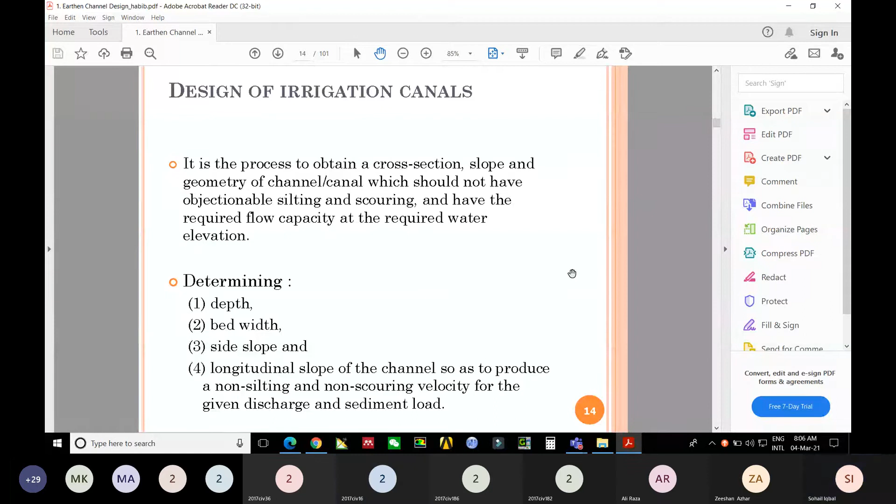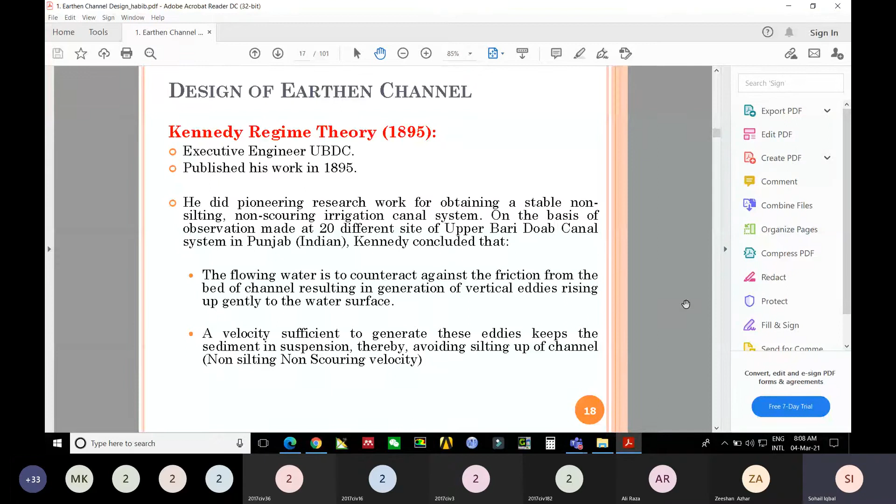So here is the Kennedy's regime theory, the most important part, and we have also studied about its conclusion in the last lecture, what he studied in 1895, and what were the conclusions of his theory. Now we will study about its equations, what equations he gave to calculate or study the velocity.

So the first formula he gave is 0.55d raised to power 0.64 in SI system. But with the passage of time, it was observed that the value 0.55 is not accurate for all types of areas. So he gave a general variable, that is m.

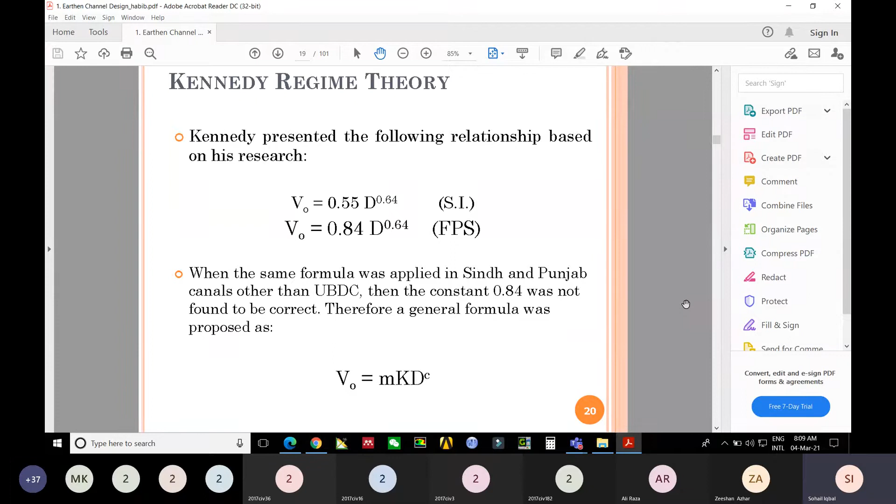M means it depends upon the area you are going to design, where you are going to design. The general formula he proposed is V naught equals mkd raised to power c. What is m? M is CVR, critical velocity ratio, and k is also a constant according to Kennedy's. K is also a constant, and its value varies between 0.84-0.85 in FPS system and 0.55 in SI system.

But the value of c is constant, and its value remains the same in either SI or FPS system, that is 0.64. So V naught is the main and major calculation in his equation, that is the non-silting, non-scouring velocity. According to him, if we put these values, you will get the velocity that will not cause scouring and not cause sedimentation, if you put these values when you are designing.

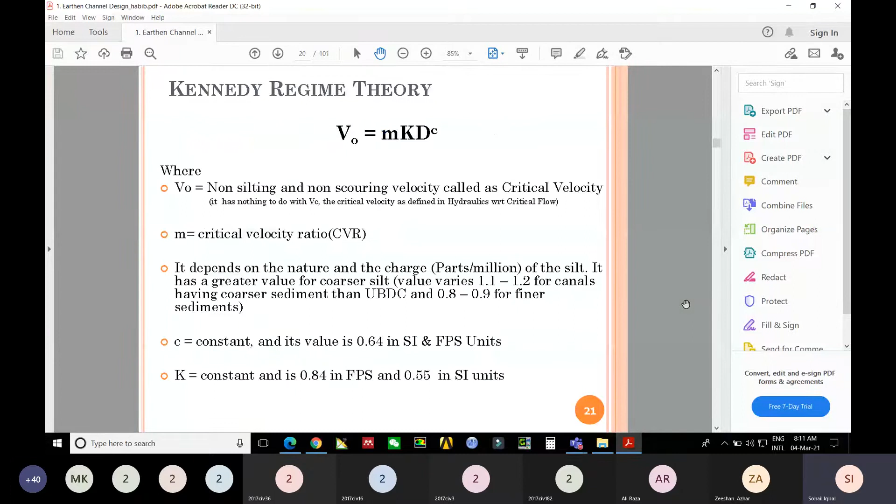His drawback is he did not give any method for CVR. Whatever values he gave, he mentioned that its value is 0.84 in FPS and 0.55 in SI system, but he could not give a general method of how to calculate it for various locations and positions when designing. So that's a major drawback.

The next drawback is he did not specify what should be the depth, what should be the shape of the channel, what should be the roughness, what should be the side slope and longitudinal slope. He did not entertain these variables at all. So it's also a drawback.

Okay, and the next one is the approximation of the initial values and the need for trial and error. When we are going to calculate depth and side slope, you have to assume these values. When you assume them, you have to apply the hit and trial method until you get the value of V naught equal to V. What is V naught? V naught is the value obtained from Kennedy's theory, and V is the value obtained from Chezy's theory.

In the next slide, we will study about how to calculate V naught using Kennedy's regime theory.

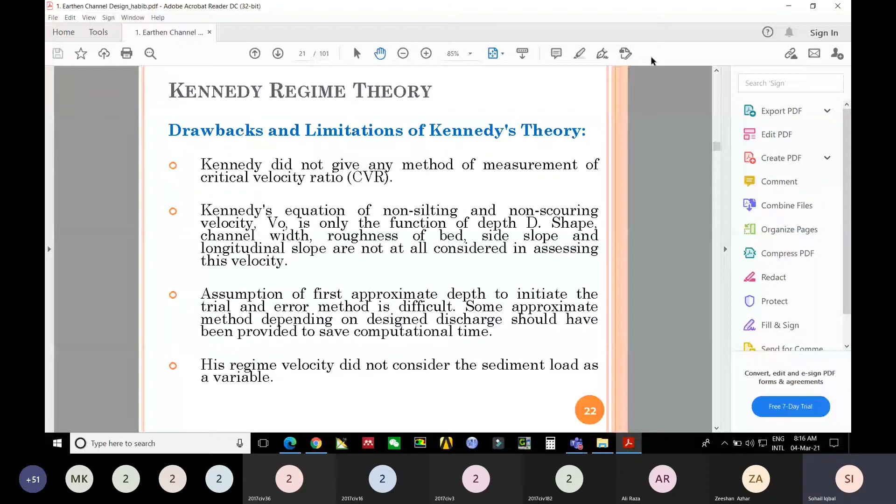In his work he did not consider these variables. That's why we also include this part in the drawback.

So what are the steps involved in the design of earthen canals? First of all, we have to assume the suitable depth. We have to assume two things, that is depth and the side slopes. Okay, first assume the suitable depth, then assume that V naught is equal to M K D raised to power 0.64.

From that you have to calculate area, because discharge is given, and you have calculated V naught from the above formula, then you can calculate the cross sectional area.

Now what will be the bottom width, assuming any reasonable side slope. So you have to assume these values of the side slope, either 1:0.5, 1:1 or 1:2.

So you have to assume depth and side slopes to calculate the hydraulic radius and to calculate the velocity. So you have to compare your answer of V naught given by Kennedy's regime theory with Chezy's formula, that is V is equal to C under root RS.

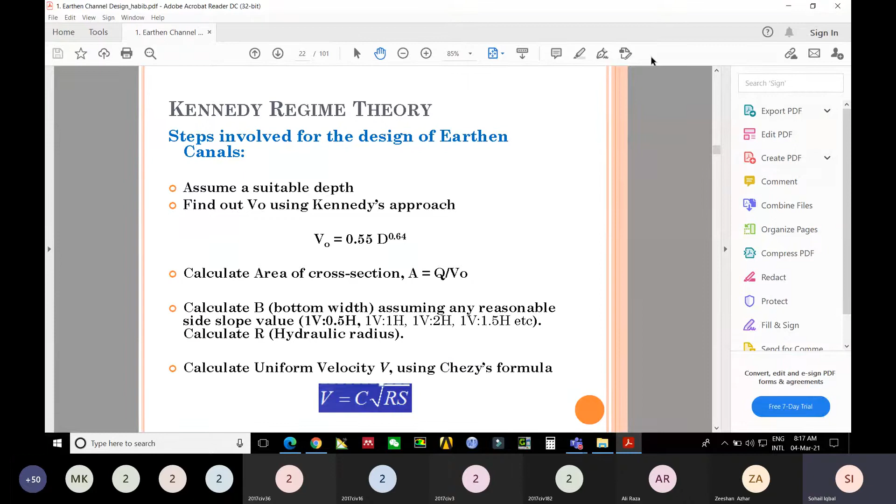C is the Chezy's coefficient, R is the hydraulic radius, and S is the bed slope. According to Chezy, when you are calculating, you have to calculate the C value from Kutter's formula, which is given in this slide: C is equal to 23 plus etc. So you have to use this formula to get the value of C.

So N is constant and its value is 0.0225 for the Upper Bari Doab. And at the end, your answer should be equal, that is V naught should be equal to Chezy's velocity.

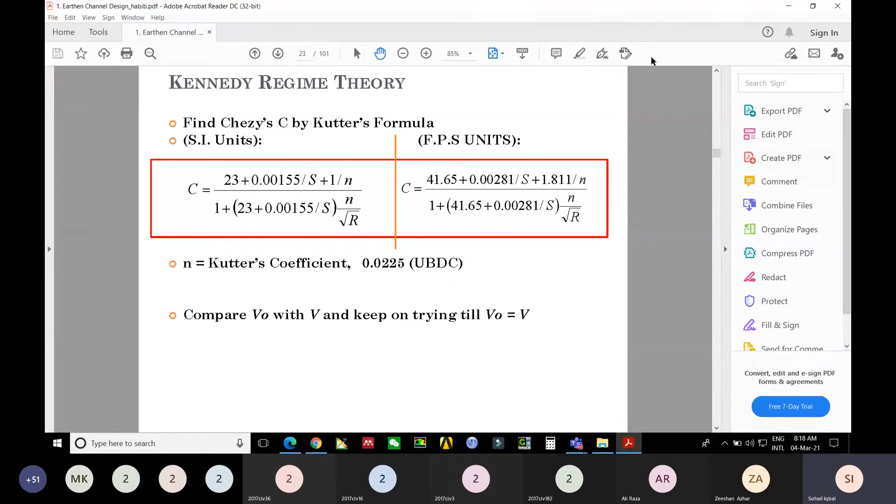Now, first example: design a channel as per Kennedy's theory to carry a discharge of 60 cubic feet per second, with longitudinal slope 1 feet per canal mile, N is equal to 0.0225 and M is equal to 1.

So first of all, you have to assume the value of depth D, that is, we assume it is 2 feet. Putting the value V naught is equal to M K D raised to power 0.64. M is given, that is 1, and K is constant for the FPS system, that is 0.84, and D we have assumed.

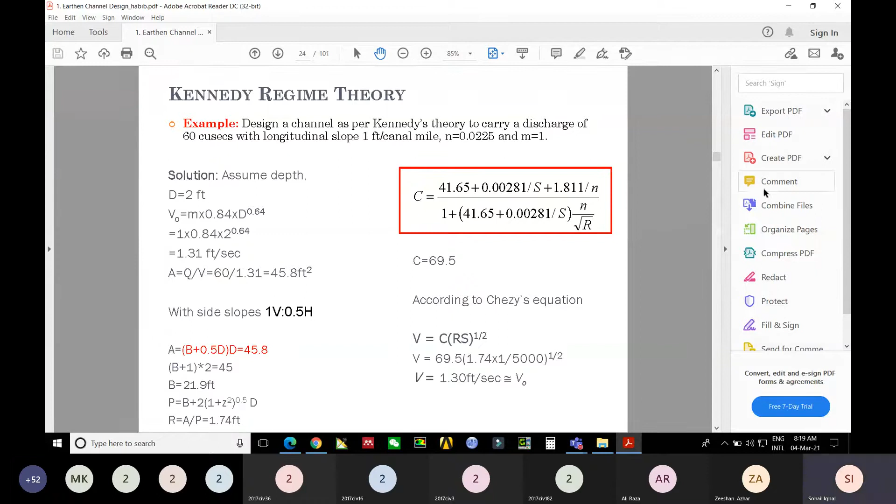After putting these values, you get V naught equal to 1.31 feet per second. Now from this velocity we will observe. We will have to calculate the cross-sectional area, that is A equals Q over V. Q is given in the statement, and we have already calculated, that will give the area, that is 45.8 feet square. Now to use the Kutter formula to get the value of C, you need the value of hydraulic radius R.

We have the value of A, but we don't have the value of wetted perimeter P. To get the wetted perimeter, to apply this formula, you need the value of B. You have assumed the value of D, but you don't have it. So for B, we expand the formula for area of trapezoidal section, that is B plus zy into y.

Or 0.5d into d, meaning 0.5 is the assumed side slope. So putting this value, you get the value of B. When you get the value of B, putting this value in the wetted perimeter formula, you will observe and have the value of wetted perimeter.

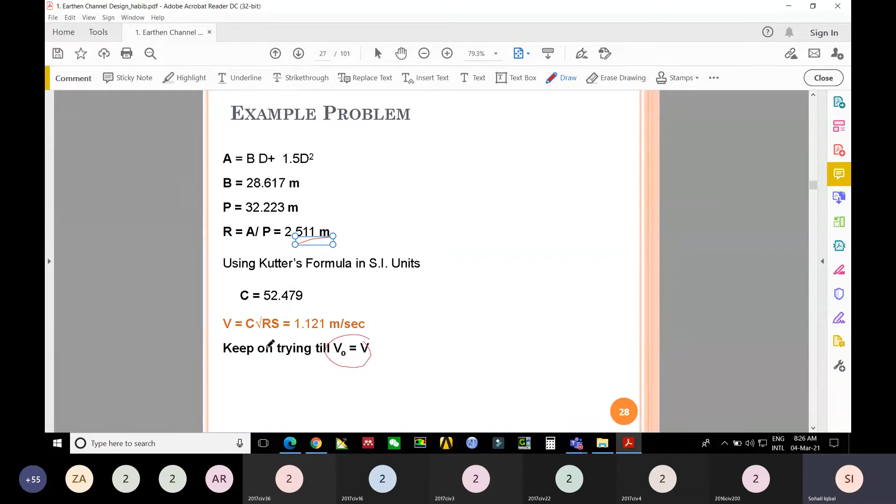Okay, so the next example is similar to the previous one. ये आपकी practice के लिए आपने खुद ही करनी है। If you have any problem, then you can ask in the next lecture. There is no difference, and all the values are given, mean answers are given. So apply the previous method and get the value of V naught should be equal to V, and you have to assume the value of depth and side slopes. Okay, इसमें भी same वही चीजें हैं और आपको assume ही करनी है the depth and side slope. ठीक है?

क्वेश्चन था लास्ट, जी सर इन केस कि अगर मैं डेप्थ चेंज कर रहा हूँ तो बेसिकली मैं जो कैनेडीज़ फार्मूला है उसमें चेंजेज कर रहा हूँ, और अगर मैं स्लोप चेंज करता हूँ तो मैं जो आपका चेज़ी फार्मूला है तो उसमें चेंजेज कर रहा हूँ। तो इसमें कोई लिमिटेशंस है या कोई बेसिक एजम्पशन या कोई गाइडलाइंस है कि आप किस तरह से या कितनी लिमिटेशंस के साथ इन दोनों चीज़ों को वेरी कर सकते हैं?

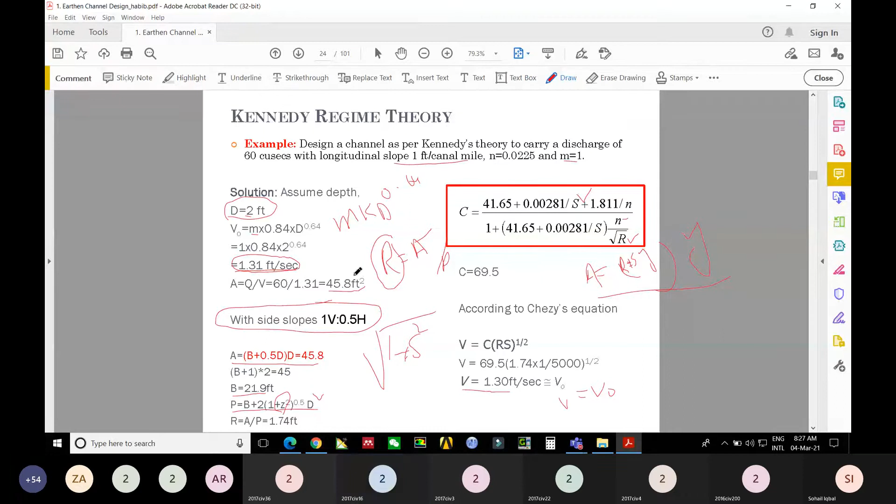बच्चे जो साइड स्लोप है, वो लाजमी बात है विदिन लिमिट ही रहनी चाहिए। ये तो नहीं है कि आप उसकी साइड स्लोप को कहीं और ही ले जाएं। जो चैनल की एक स्टैंडर्ड फॉर्मेशन होती है, अगर आप इसकी साइड स्लोप इंक्रीज करते जाएंगे then definitely आप ऑब्जर्व कर सकते हैं कि जो ट्रापेजोइडल सेक्शन होगा उसकी साइड स्लोप कहाँ पे चली जाएगी, बिल्कुल डाउनवर्ड ही नहीं कर देना। दे शुड बी स्टेबल, दैट इट कैन कैरी मैक्सिमम डिस्चार्ज।

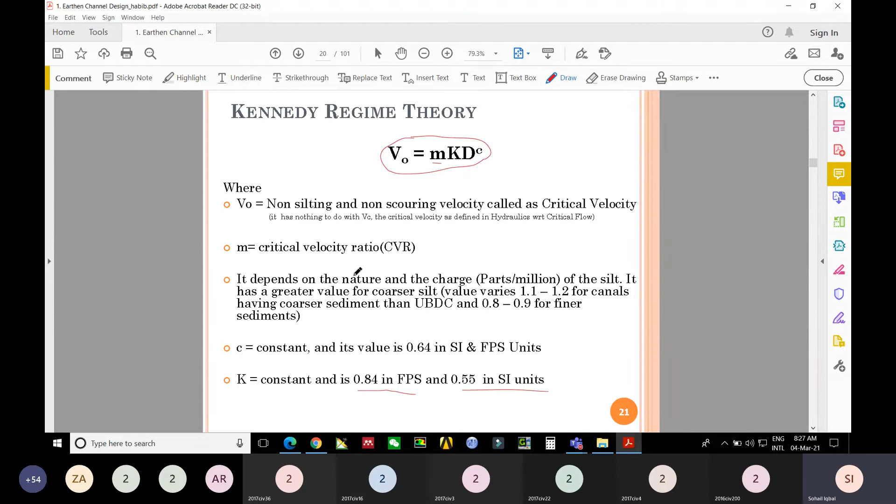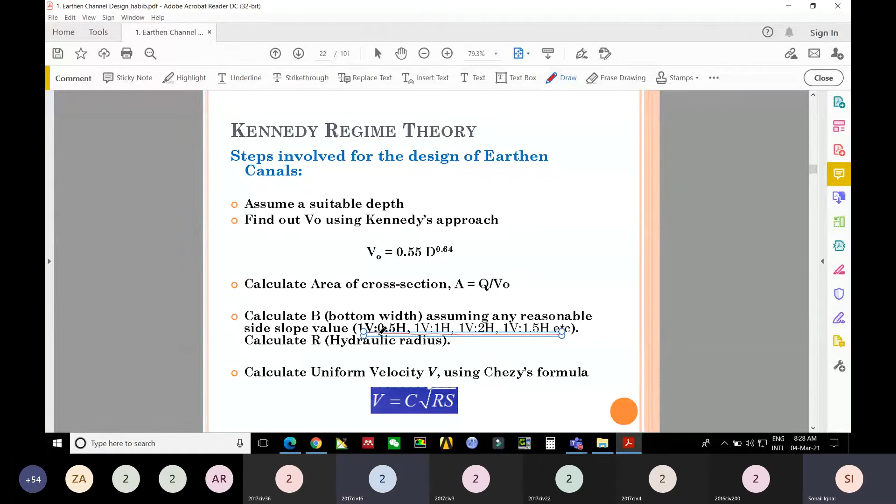ठीक है, तो अब ऑलमोस्ट इन्हीं में से कोई ना कोई value लग जाएगी, जैसे there is little bit difference that is 1, 0.5, 1, 1, 1 to 1.5, तो इन्हीं के अराउंड ही रहकर आप can achieve the required answer। अब ये तो नहीं है कि आप फॉर एग्जांपल 1 वर्टिकल रखें और हॉरिजॉन्टल आप 3 रख दें। ठीक है, तो लाजमी बात है, जनरल सी बात है कि विदिन लिमिट ही आप उसको एज्यूम करें, ताकि वो फिजिकली डिजाइनेबल हो। अगर आप उसकी स्लोप्स को इतना ज्यादा या उसकी जो डेप्थ है इतना ज्यादा कर दें और साइड स्लोप्स को कम कर दें, इज इट पॉसिबल कि हम उसको फिजिकली डिजाइन कर सकें?

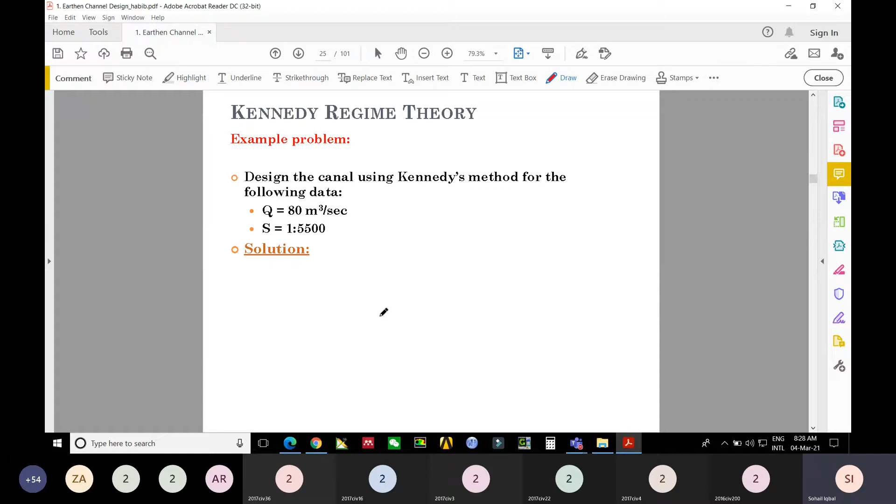तो ये आप जब इसकी प्रैक्टिस करेंगे, hit and trial method है भी यही। जितनी ज्यादा आपका literature review होगा, जितना आप literature में experience होगा for the design, then definitely you will have to get answer in a very short period। तो उसमें ये चीजें आप with the passage of time, experience के साथ ही सीखेंगे। Okay sir. Okay.

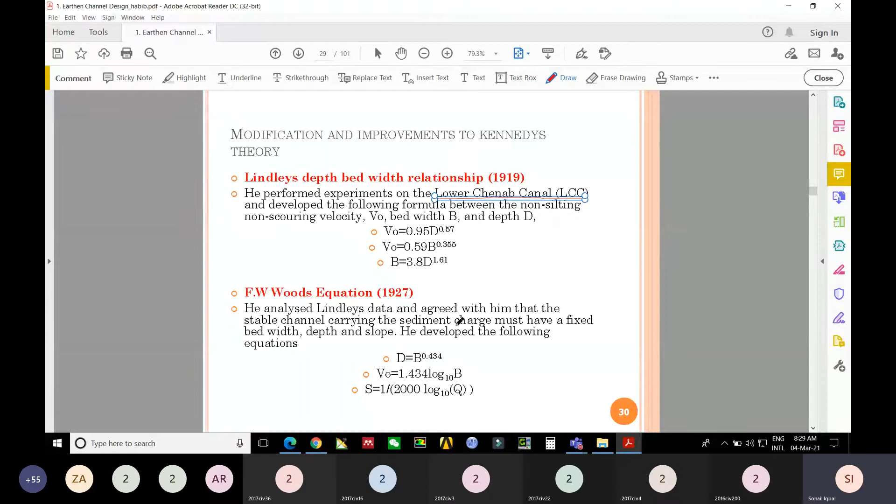Now after 1895, 1919, Lindley's depth width relationship. So Lindley gave a relationship for the velocity and depth. Okay, so he performed experiments on the lower Chenab Canal, LCC, and developed the following formula between non-silting and non-scouring velocity, V naught. Okay, so he gave different formulas to calculate the non-silting, non-scouring velocity. There is only formulas and there is no derivation, no according to his numerical where we apply and where are the steps. So just remember that he gave different formulas to calculate the non-silting, non-scouring velocity.

Okay, so the next one is the FW Woods equation. ये different आगे theories आएंगी, जिसमें they tried to improve the Kennedy's regime theory, and at the last there is the theory that is Lacey's regime theory. After Kennedy's theory, Lacey's regime theory was the most important, and still we are using Lacey's regime theory. Okay, so FW Woods equation in 1927 - he also gave non-silting, non-scouring velocity relation, and to calculate the slope, not to assume. Okay, so you can calculate the value of slope, not assuming but from the discharge. Okay, so these were the formulas given with the passage of time in 1927.

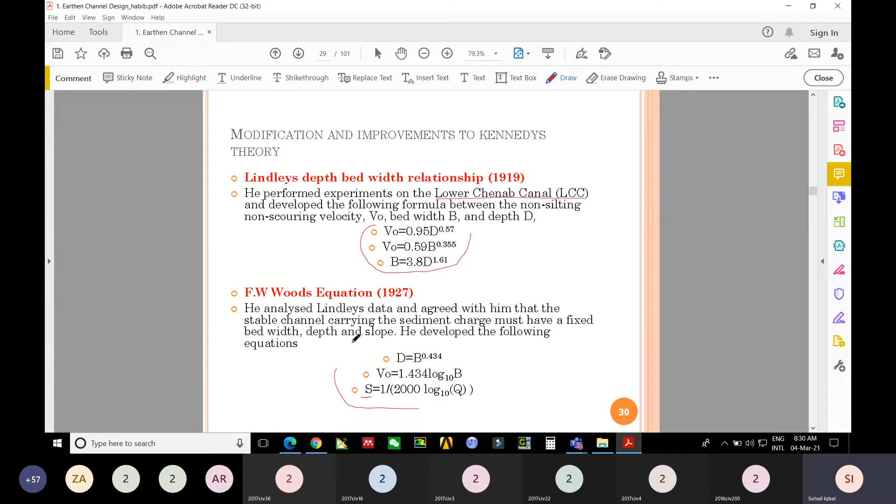Now, the most important theory that is being used today, and still being used today, was given in 1930 by Lacey.

Lacey developed relations for determining regime slope and channel dimensions. In the previous Kennedy's regime theory, he did not give the accurate or exact values of what should be the side slope and channel dimensions. So Lacey resolved this issue.

So first of all, what are the basics of his theory? Water discharge, sediment grade and charge are constant. What is charge? What do you think is the charge or constant?

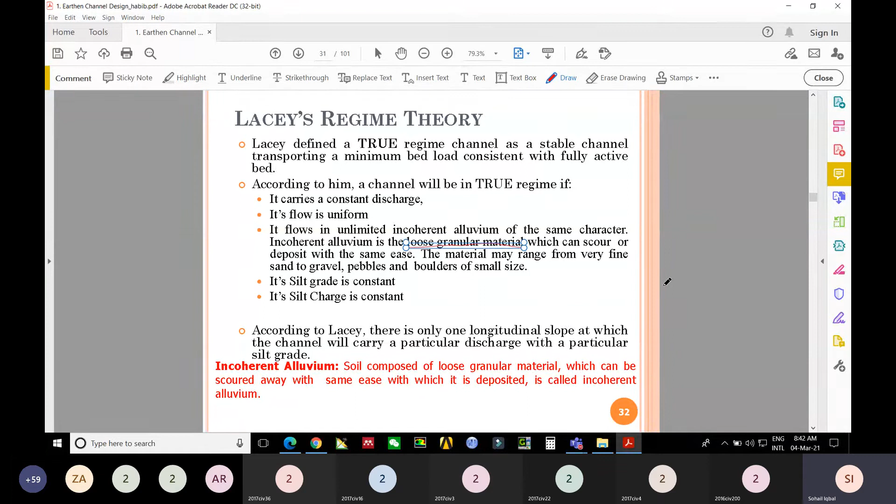Anyhow, his theory was based on these points. He says that if any channel satisfies these factors, then definitely that channel is known as true regime, according to Lacey. So there is only one longitudinal slope at which the channel will carry a particular discharge with a particular silt grade. Now, incoherent alluvium soil, we have already spoken about that.

Now, he said there is an initial and final regime condition of the channel. What is the initial regime and what is the final regime condition? In the initial regime condition, he said that shortly when we have initiated the water, or we have started to get the water from the river to the canal, then initially the water will definitely scour, and there will be a siltation and scouring process initially at the start of the channel that carries the water. And with the passage of time, at some specific time, it will adjust its complete section.

There will be no scouring and siltation. A stage will come when there is neither scouring nor siltation there. So the condition where the channel adjusts its complete section is the final regime condition. According to him, there is an initial condition where scouring and siltation occur, and there is also a final regime condition where there is no siltation and scouring at that section.

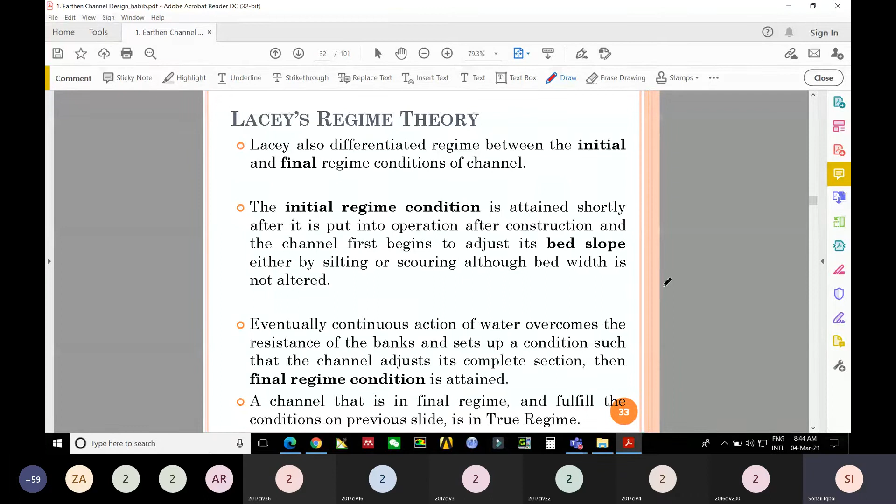And if the channel at that final regime condition has no siltation and scouring, then that channel or that regime is known as true regime.

Now, here are some formulas that Lacey used for his theoretical approach in SI system and FPS system. First, to get the wetted perimeter, if you have the discharge, you can calculate it as 4.75 root Q. Next, Lacey's silt factor F is equal to 1.76 under root D50, and D50 should be given in mm.

What is D50? It is the median particle size of sediments, or the diameter of the particle at 50% passing.

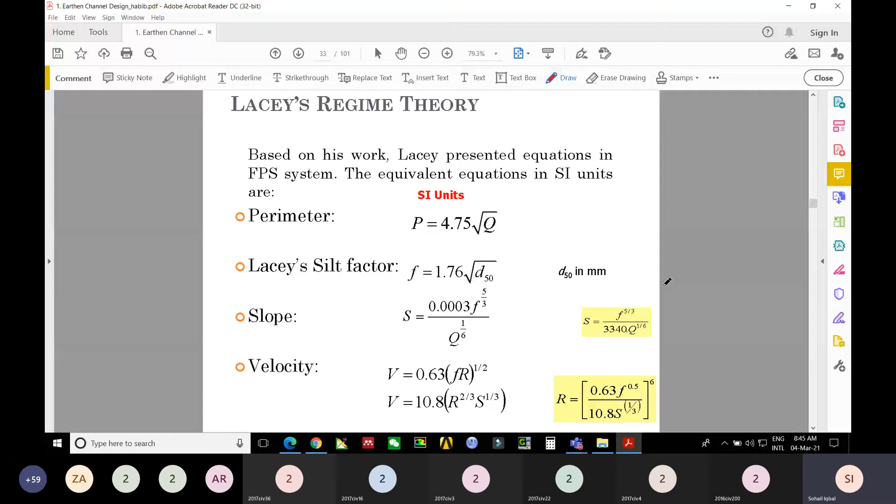Slope can also be calculated from the silt factor and the discharge, and velocity can be calculated from either hydraulic radius and the slope, or the silt factor and the hydraulic radius. All the formulas are given in the SI system, and on the next slide, all the formulas are given in the FPS system, so you can also convert from SI to FPS and FPS to SI.

Now, after these formulas, there are also some drawbacks of his theory that should be addressed, even after tackling the drawbacks of Kennedy's regime theory. In Kennedy's regime theory we studied its drawbacks and limitations, and after 1895, Lacey gave his theory in 1930, almost 35 years later, but still it has some limitations or drawbacks. Now let's consider what these drawbacks are.

He verified that his theory is only theoretical and cannot be achieved practically except in alluvial rivers, because all his research work was on the alluvial part, that's why this can only be achieved in alluvial rivers. Also, the various equations are derived considering the silt factor, which is not constant all the time.

So the silt factor is also not constant. We have to face trouble when you are going to use it at any other location, either in Punjab or in Sindh, because this silt factor cannot verify your answer there.

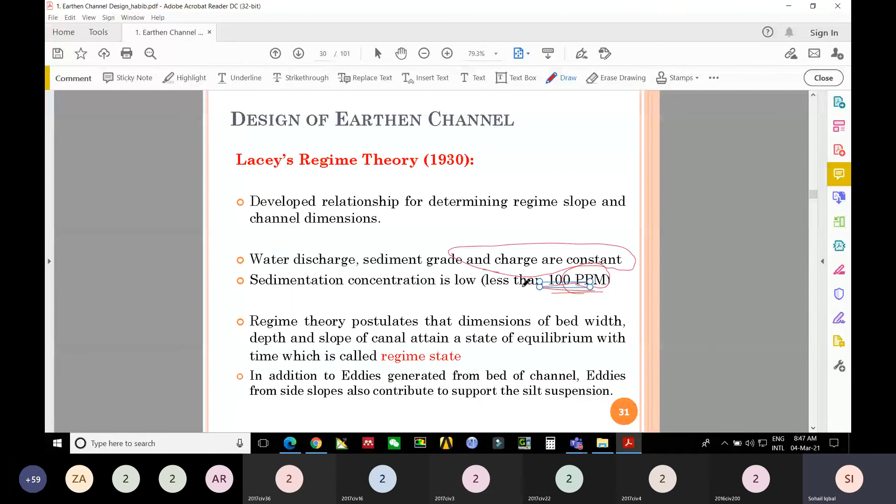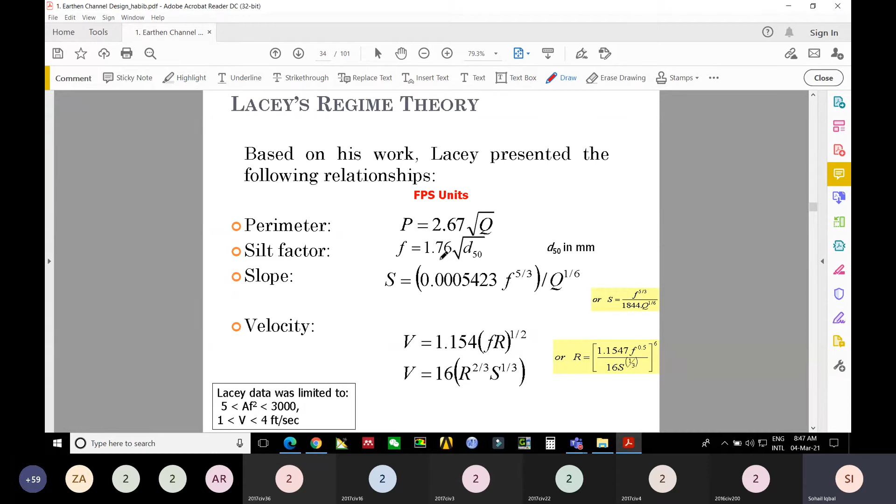So the concentration of silt is not taken into account at all. He takes only less than 100 ppm. This means that when water is passing from river to canal, it does not necessarily contain a concentration amount less than 100 ppm - it may be greater than that.

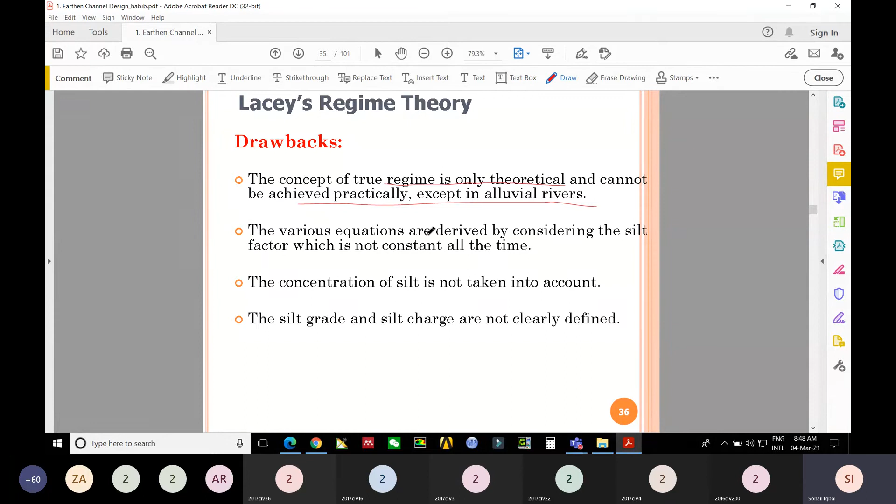According to his theory, you can apply Lacey's regime theory where the charge of particles in the water is less than 100 ppm. You cannot use this formula if the silt factor is greater than 100. So the concentration of silt is not taken into account, and the silt grade and silt charge are not clearly defined - there is no grade of silt considered in Lacey's regime theory.

Now there is a numerical to resolve using Lacey's regime theory. First, here the discharge and the size in mm are given. If slope is not given, you have to assume these values in the numerical. Wetted perimeter is given, and the silt factor F is given, so all the formulas will be used when applying Lacey's regime theory.

At the end, if you want to get the value of B, the bed width, and depth, your equation will be in the form of a quadratic equation, that is D is equal to minus B... What do B and B square mean here? If you get the values of wetted perimeter and area, then it will give you A and B. These values will be put into the quadratic equation, and you will get the value of channel width and depth of flow.

These two variables, channel width and depth of flow, can be obtained from the quadratic equation when using Lacey's regime theory.

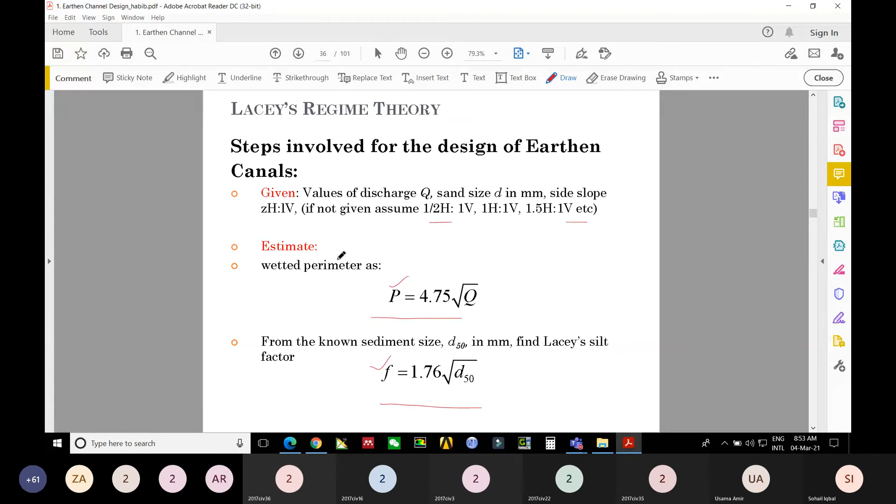Children, in the question it is given that we have a discharge of 60 meter cube per second and we have the slope 1/50,000. What is this slope and what is this slope? What is the difference between them?

That is the longitudinal slope, and that is the transverse, the cross-section transverse. Yes, okay, so it is the longitudinal slope or the m, and the other one is the side slopes. So first of all you have to calculate the wetted perimeter.

For the wetted perimeter you need Q. You have the value of Q, put this value in and you will get the value of P.

After achieving the value of P, Lacey's slope equation is S is equal to 0.0003 F raised to power 5/3 divided by Q raised to power 1/6. From this formula F can be achieved, because you have the value of S, you have the value of Q, then you can obtain the value of F.

Okay, so next one is the value of D50. You have Lacey's silt factor F is equal to 1.76 under root D50.

You don't have the value of D50, so easily put the value of F that you achieved in the previous step, that is 1.15. So 1.15 is equal to 1.76 under root D50, and you will get the value of the only unknown variable, D50, in mm. So next one is the hydraulic radius.

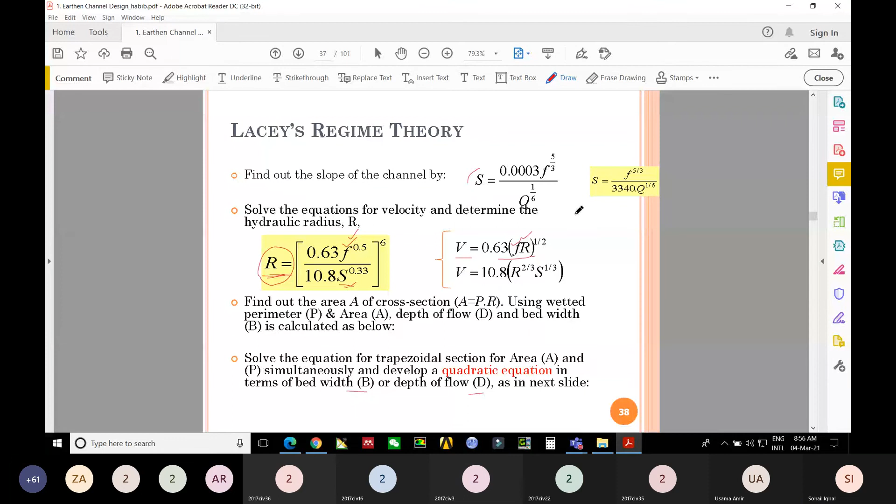When you get the value of velocity, that is 0.855 meter per second, then what is the value of depth? For that you have to put the value of area for the trapezoidal section and wetted perimeter, and make the formation in the quadratic equation, that is minus b plus or minus under root b square minus 4ac divided by 2a. So you will get the value of d.

The variables in the form of a over p, so you convert that into this form. In this form you will get the value of wetted perimeter, you have to calculate the value of d, you have the value of z. So put these values and get the value of d.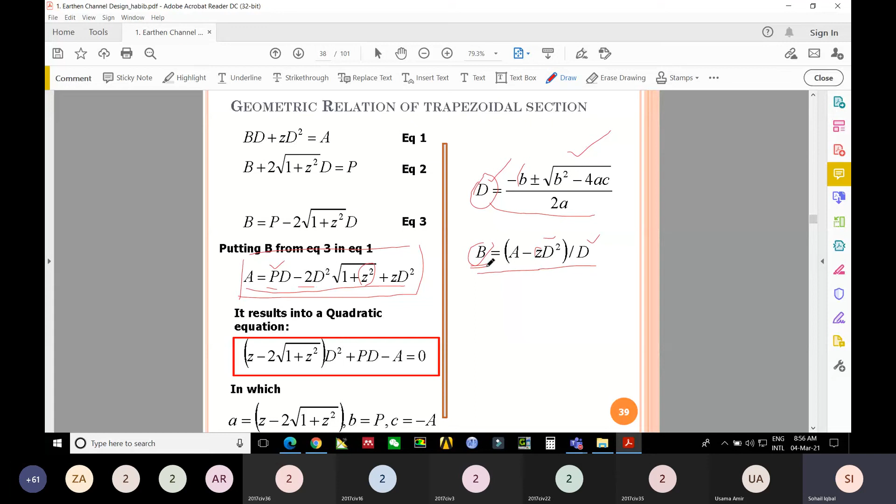When you get the value of d, then easily obtain the value of b, because you have the value of slope, z, depth, and the other one is the area, that is b into d. Area is equal to b plus zd, multiplied by d.

So easily calculate. These are direct steps, you might be a little confused, but when you solve it, it's very simple and easy, you can easily sort it out.

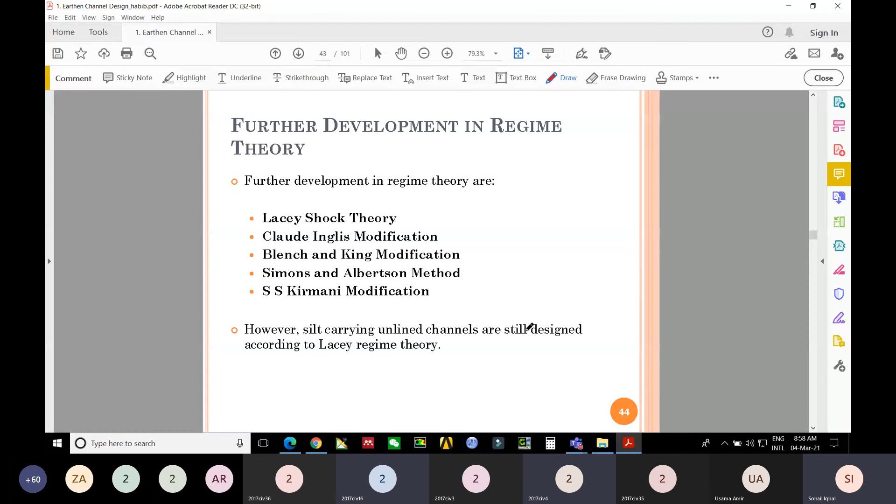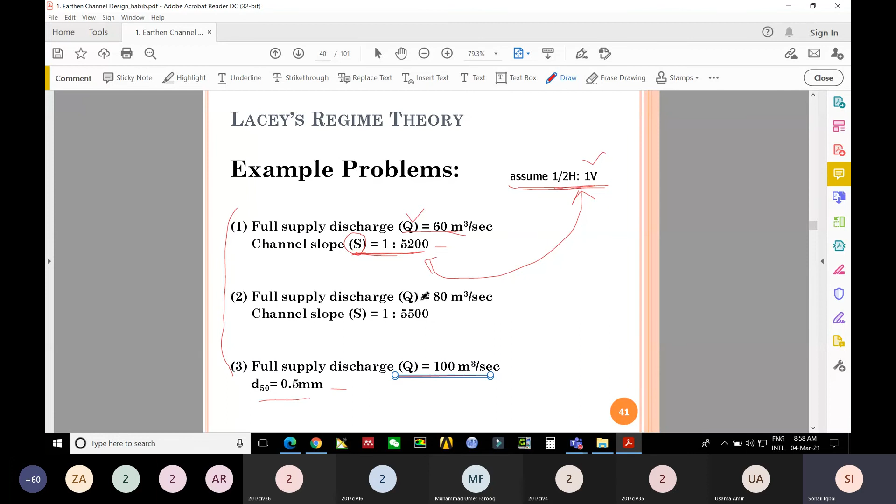See here, Q, look at this equation, you have the value of Q, yeah, you have needed silt factor. You can get the value of silt factor from this equation because you have the value of d50. So you have the value of f, you have the value of q, so you can get the value of S, bed slope S naught.